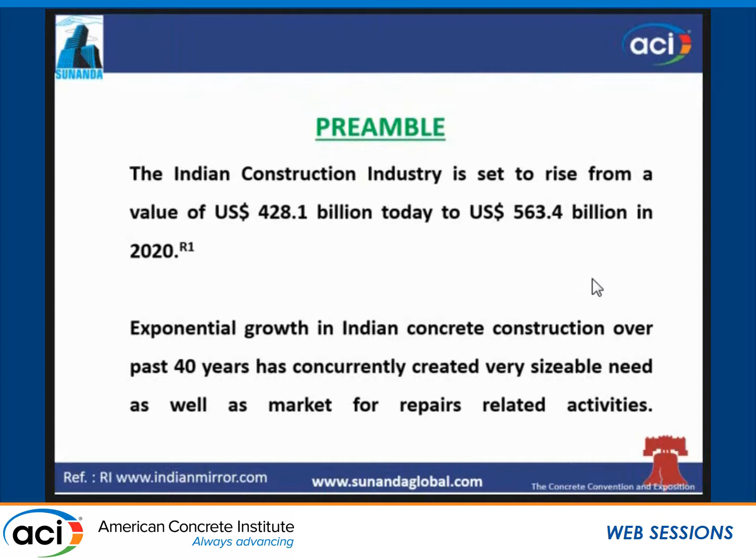India, just to give a number, is a 428 billion dollar construction industry today, slated to be 563 billion by 2020, and this exponential growth has happened in the last 4 to 5 decades. When this has happened in the last 4 to 5 decades, that means we have so many old structures in the last 3 decades which need our attention.

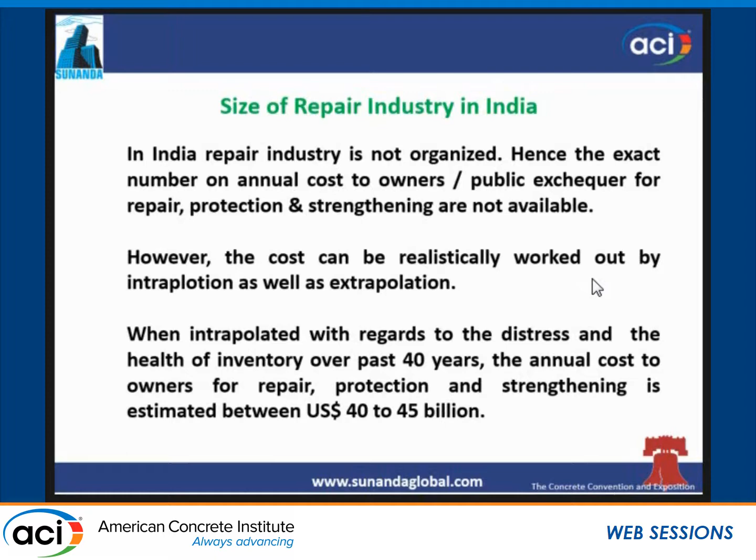If you just look at the number and cost of the repair industry, this is an unorganized industry, and that's why I had to knowledgeably interpolate and extrapolate the numbers. These are more or less real numbers, and it comes to something like 40 to 45 billion US dollars per annum.

If this is the size of this unorganized industry, then we need to look at why this deterioration has happened and what the Indian repair industry is seeing.

India is the second largest manufacturer of cement in the world, to the tune of something like 375 million tons per annum. India has transitioned from 15 MPa to 60 MPa concrete in the last 40 years. That means the stock that was probably of lesser grade concrete from years ago has come as a legacy which needs to be repaired and corrected.

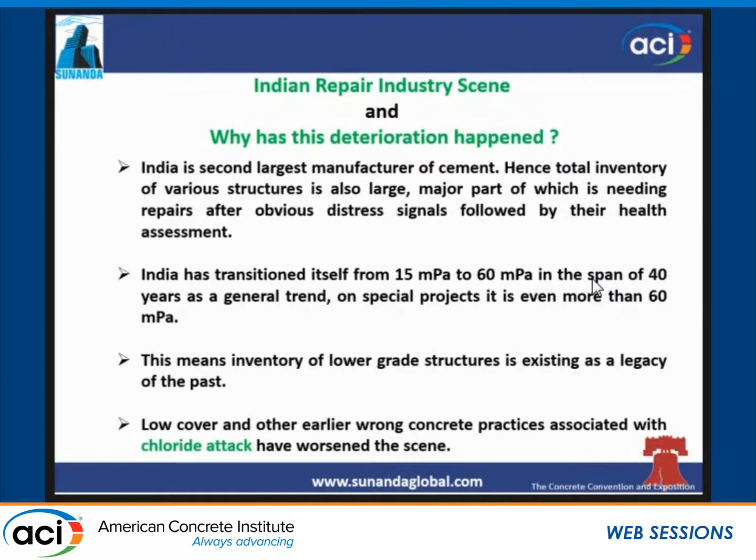In addition to that, low cover and other earlier wrong concrete practices, chloride attack, etc. have worsened the scene. India is a hot weather country with a long coastline of 7,000 kilometers with tropical rains. High temperature, humidity, high chloride attack, and high pollution are all game players here.

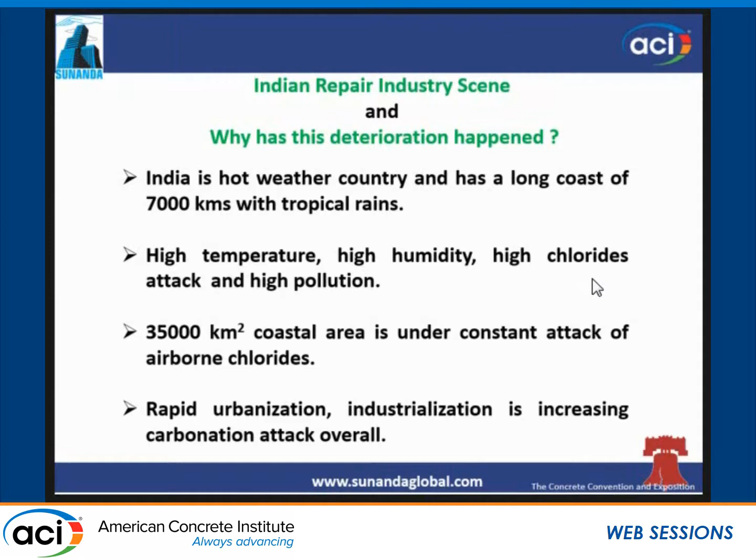35,000 kilometers square of coastal area is under constant attack of airborne chlorides. In addition to that, rapid urbanization and industrialization is increasing carbonation attack overall.

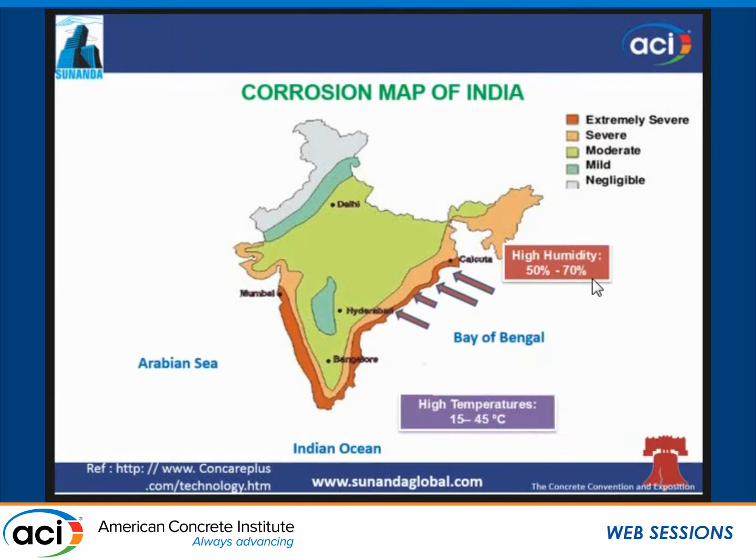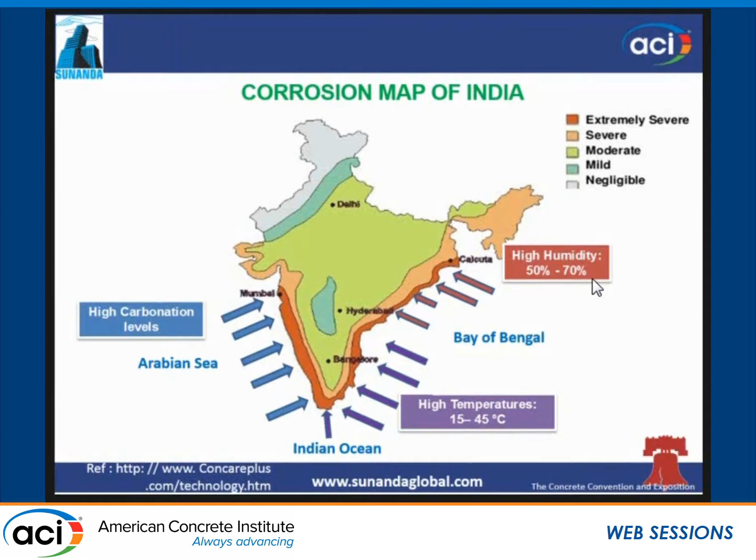This is the corrosion map of India. You can see various zones ranging from extremely severe to severe to moderate. This is the coastline, with high humidity, oceans from all sides, high temperature, chlorides, high carbonation level, and this is also one of the reasons why the repair industry is so big.

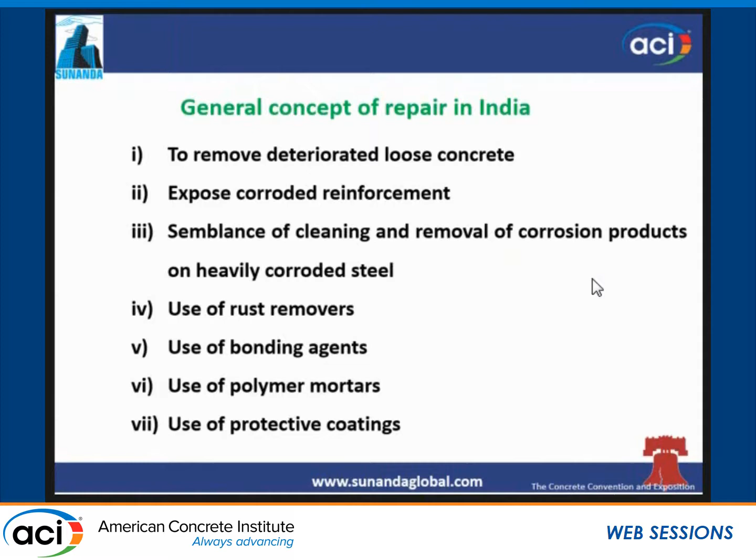What are the general concepts of repair in India today? They are no different from anywhere else, principally: removing deteriorated loose concrete, exposed corroded reinforcement, then some cleaning and removal of corrosion products from corroded steel, rust removers, bonding agents, polymer mortars, protective coatings, same thing.

However, with this exponential growth of the repair industry, unsatisfactory performances over the last 4 to 5 decades bring out what we need to look at: improvements in materials, design practices, installation procedures, contracting processes, QA/QC procedures, and most of all, education and allied aspects.

The common man is often getting alarmed by distress signals. Signals can be cracking, delamination, failure, or collapse. And when this happens in the whole neighborhood, state, or district, a chain reaction starts and the repair industry again starts booming.

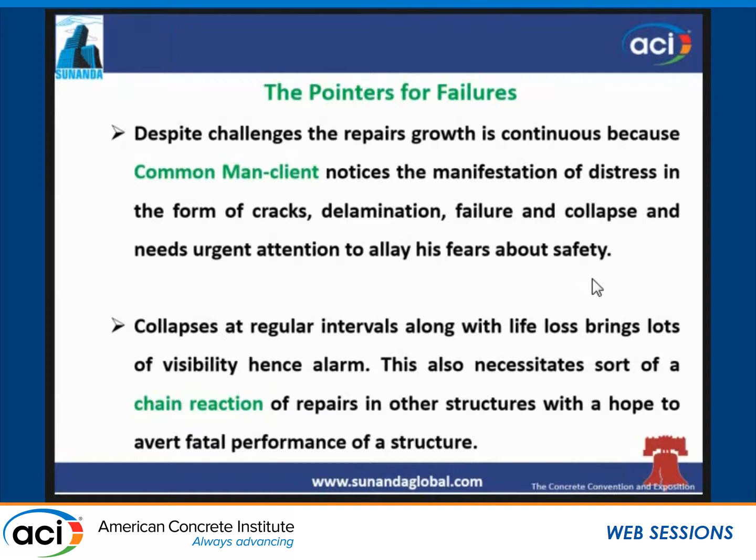This is one of the cases, in a downtown area. This can happen in a downtown area, and all the structures nearby or in the nearby districts also awaken all of a sudden, and whether they needed the repairs or not, the whole process began.

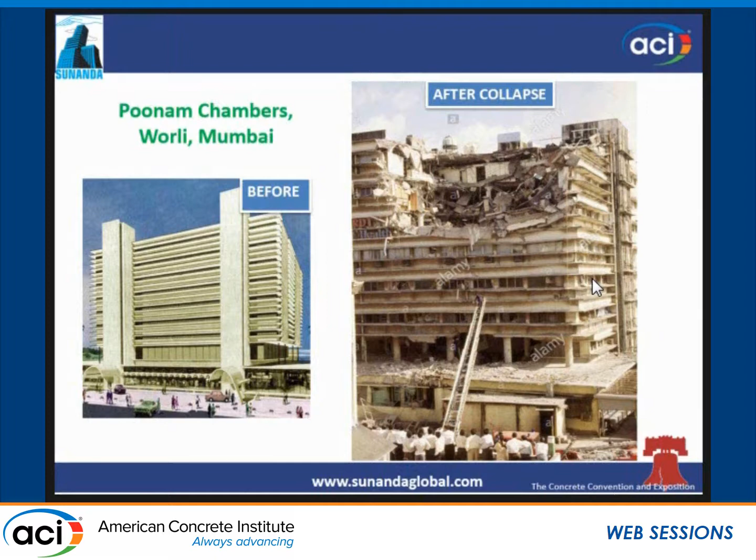I told you that most of the concrete inventory is more than 10 years old, and the concrete was site-mixed in those days without much control. Obviously they become more vulnerable to carbonation, chloride, and loss of alkalinity attack.

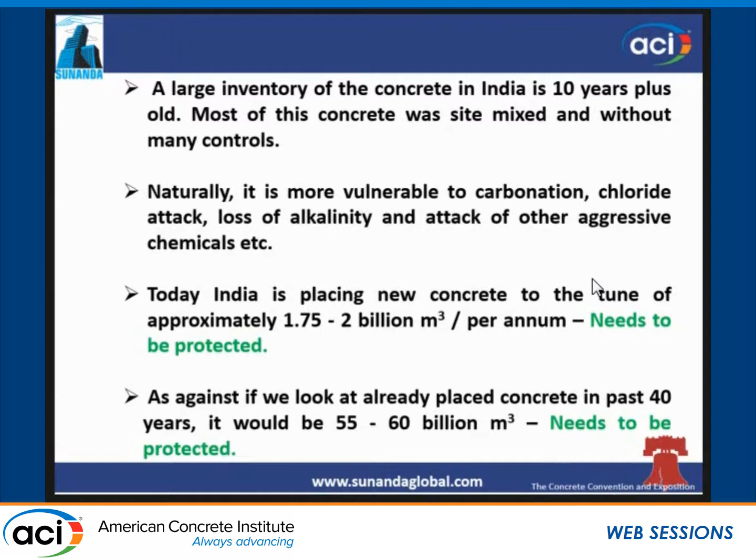New concrete today we are doing something like 2 billion cubic meters per annum. Of course this needs to be protected, and this will be protected. However, whatever has been placed in the past is something to the tune of 55 to 60 billion cubic meters, and that needs to be protected more, and that's where this thriving repair industry is coming from.

The short life cycle of repairs raises questions on the knowledge and awareness of the technical competencies of related personnel and agencies. Personnel can be consultants, engineers, contractors, or clients. Rebuilding the older structure is not the general norm, and that's why structures are to be majorly repaired, and as you will see ahead, unfortunately re-repaired.

In colleges, in schools, engineers or students are not taught concrete as a science and steel corrosion, and that's why that also needs looking into.

As a result, many areas remain grey areas, and hands-on training as well as learning state-of-the-art procedures is important. More sadly, material science, which is really an inseparable part of new age civil engineering, is not taught or learned anywhere, and that's why materials like polymers, epoxies, protective coatings, nanomaterials need more information for everybody.

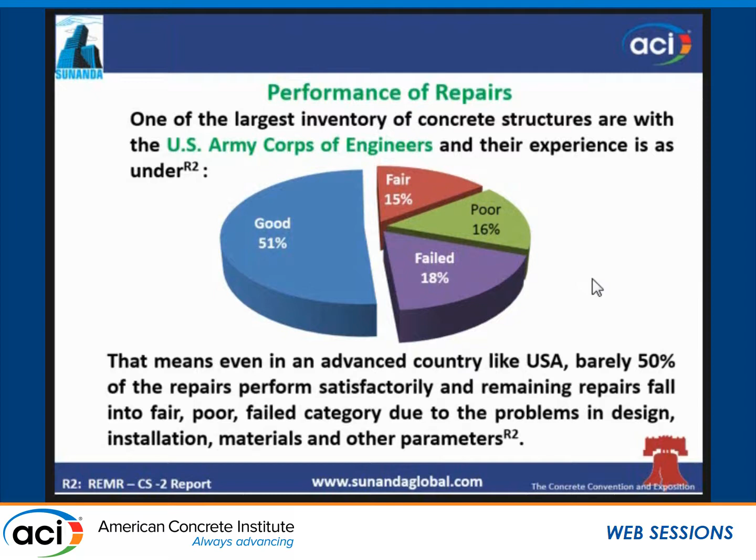What is the performance of repairs in India? For that I have taken some reference. US Army Corps of Engineers have just published data on their repairs, and this is the situation of repair performance in an advanced country. If you extrapolate, then that 50% would probably go to 20% or thereabout in India, and the rest will be as this is.

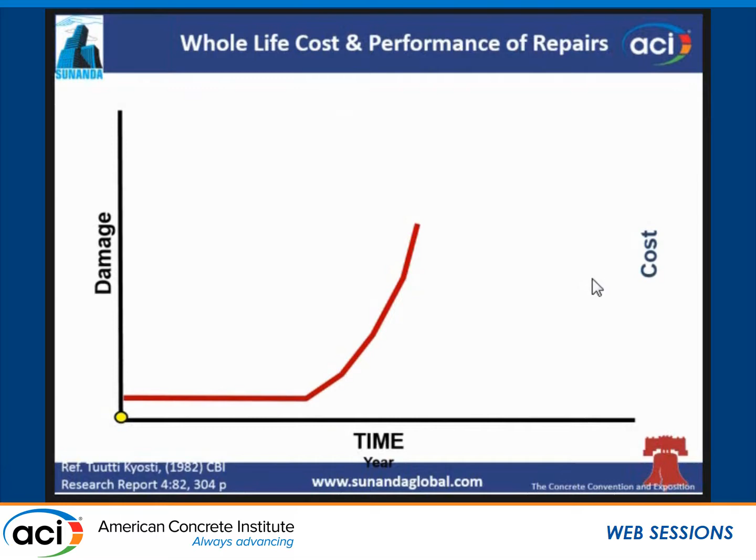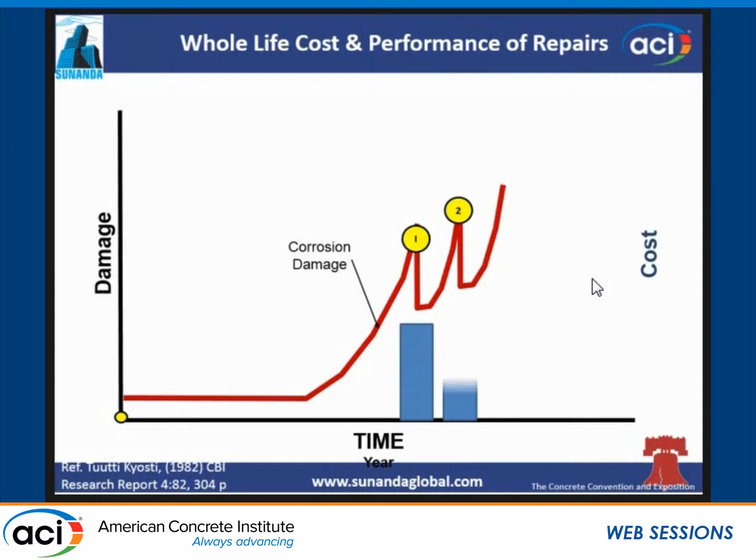What is happening? Damage versus time versus cost. The structure, when it gets corroded and damaged, loses its capacity, and then at first time intervention is required, the first repair happens. Damage comes a little down on the y-axis, then another repair happens because of lack of understanding while doing repairs, and then the cost mounts - second, then third, then fourth.

Like that, the cost goes on increasing, and that is exactly why we need to look into the concepts of responsibility as well as awareness concurrently together - cost 1, cost 2, cost 3, cost 4, and like that.

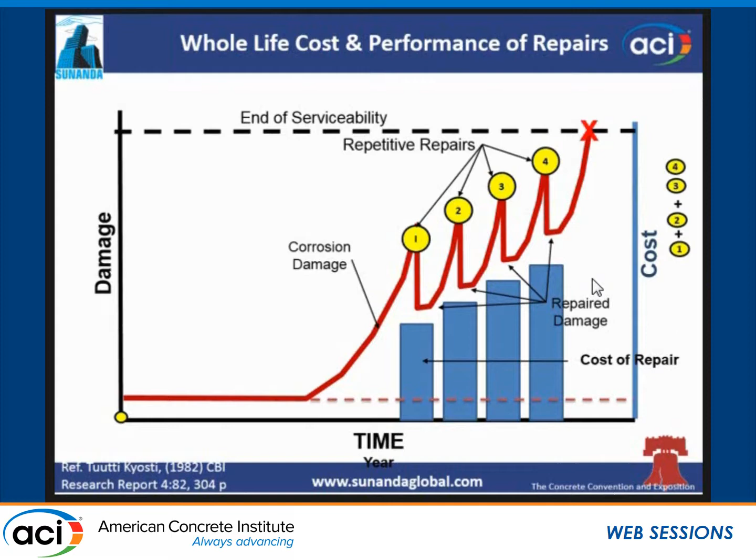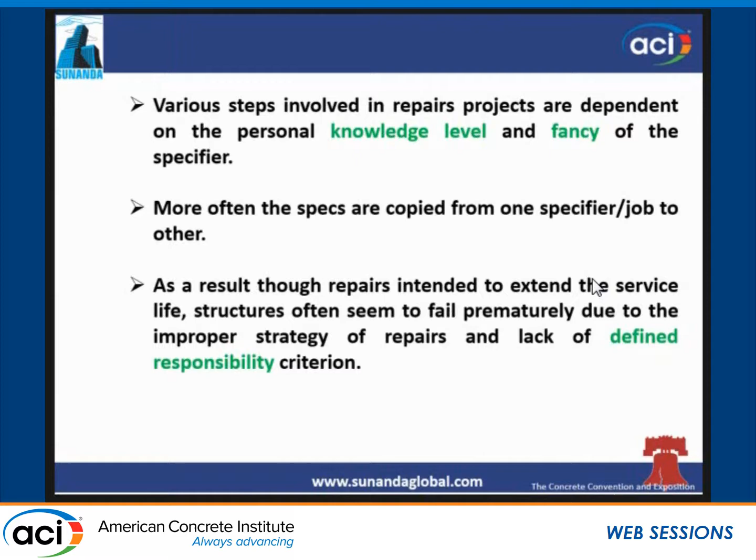As a result, the repairs intended to extend the service life cause the structures after repair to fail prematurely, and that's where defining responsibility criterion comes into the picture.

All this is realized, but it is realized too late when the failure and the loss is irreversible. Just to inform you, there are some quacks also practicing who will say that we will not charge you anything, or we will take nominal fees. How do they sustain and run their offices and homes, I don't know.

But then why does this happen? This happens because the industry and the country and the requirement is so big that somebody or the other, one victim or one gullible person, is always there to fall prey to this type of practices. Hence, strategy - I'm trying to present a strategy to increase the accountability of stakeholders and also make them collectively responsible.

Before that, there are several operations needed in repair jobs. All of us know: membranes, surface preparation, grouting, crack injection, foundation underpinning, vertical repairs, gunniting, shotcrete, underwater repairs, waterproofing, general concrete repairs, concrete placement, formwork, steel placement, post tensioning, cathodic protection, industrial floor repair. All these are specialized jobs, and when they are all specialized jobs, responsibilities come into picture.

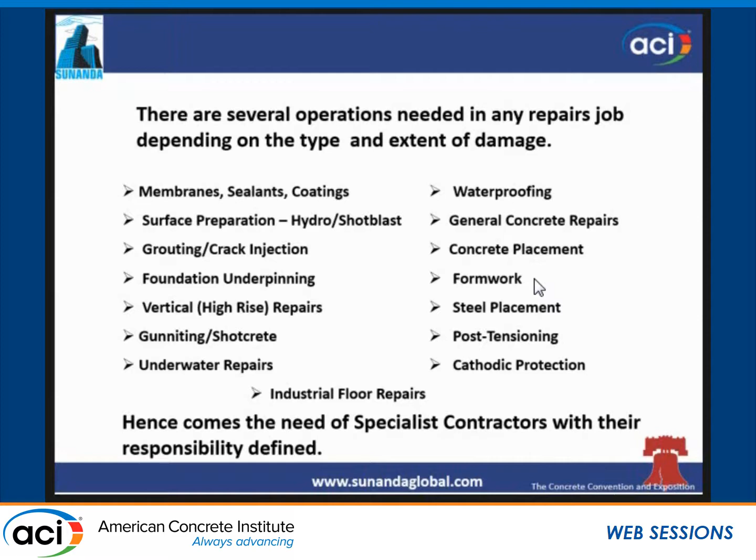Another thing is, individual repair jobs are smaller in value as compared to new construction, as was mentioned earlier. It becomes difficult for government authorities to just give completion certificate and inspect every small thing that is happening throughout the country.

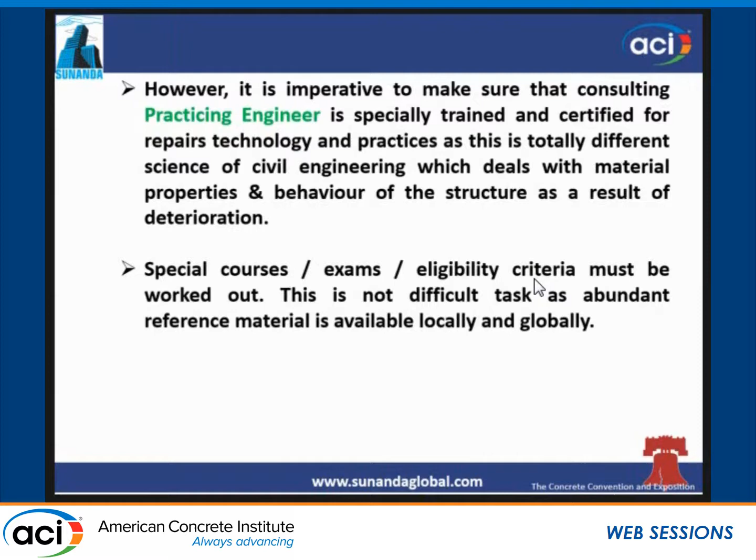And hence, the responsibility comes on the consulting practicing engineers, and they have to be specially trained and certified for repair technology and practices, and whatever I just talked about earlier about awareness becomes underlined. So if this unified procedure of qualified civil engineers is not there, then the consulting engineer has to wear several caps.

He has to wear the cap of an NDT expert, he has to wear the cap of material specialist, he has to wear the cap of corrosion expert, but he is only trained for civil engineering.

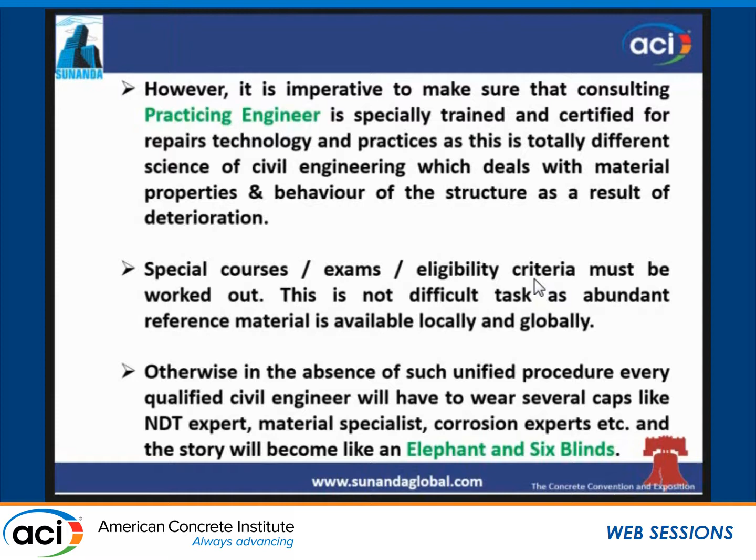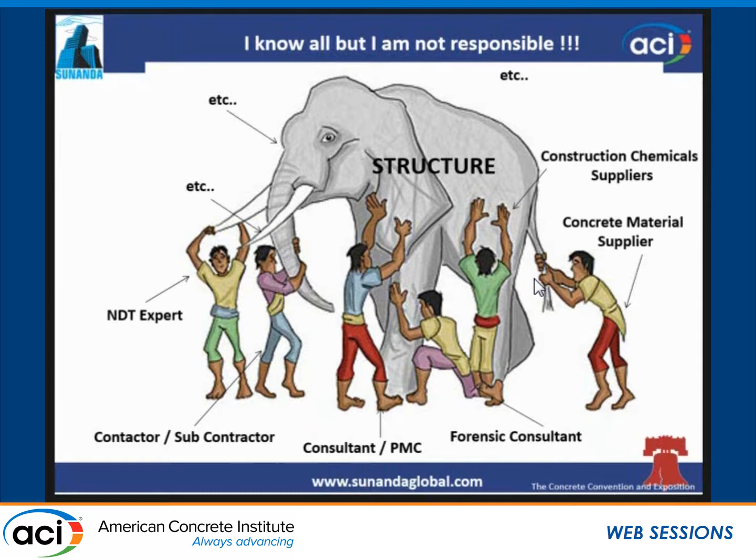And then the story becomes like the elephant and the six blind men. One person doing all these roles, and whichever part of the elephant or the repair comes in his hands, the repair will be treated in that direction. And hence the performance is as shown earlier.

Being smaller in value, we cannot have multi-level supervision. That is difficult and uneconomical, and that's why the consulting engineer and the contractor have to be more trained, more aware, more knowledgeable. But oftentimes the entire 360 degree idea about analytical, diagnostic and QC parameters for the contract, both on prescriptive as well as performance format, is not known to any one of them or most of them. And this is more so because it's not new construction - it has a multifaceted complexity along with ignorance.

So remediation can be, in my opinion, done only by two ways: increasing awareness and defining responsibilities.

Stakeholders - these are the stakeholders: engineers, architects, contractors, equipment suppliers, material manufacturers, testing companies, educators, researchers, lawyers, and they are benefited. But when they are benefited, it is always associated with the responsibility.

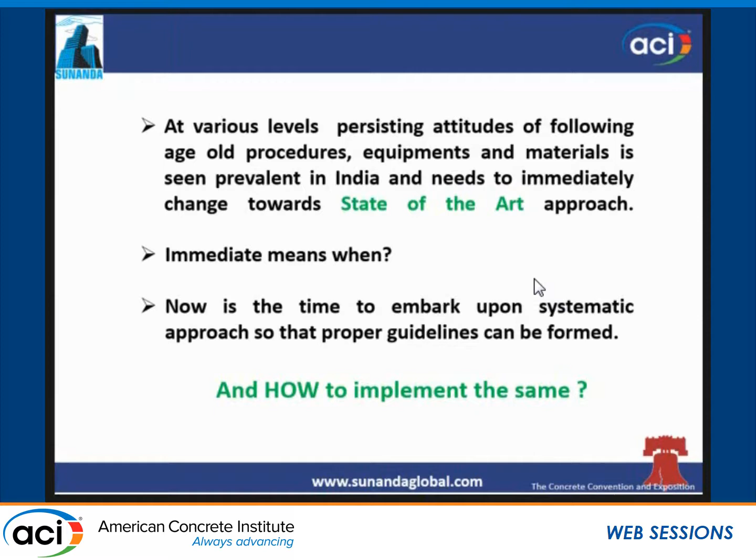The methodology, equipment, and procedures are old and not updated, and that also has to be brought to the state-of-the-art approach, and that has to be done immediately. Immediately means when? Immediately means yesterday, now. This is the requirement of the industry back in India. So now is the time to embark upon a systematic approach so that proper guidelines can be formed and implemented.

Then we come to the action plan. The action plan is to form a devoted group having representatives of contractors, engineers, material manufacturers, researchers, educators, owners, material scientists, and industry associations. Along with this group, if a nodal federal agency is also present in the system, then it gets some sort of credibility, authority, and compulsion to the recommendations of this group.

This should be a faster and far-reaching approach than leaving it to the industry alone. It must be made a time-bound initiative in the interest of the stakeholders, and the draft and the code will be peer-reviewed and then sent for wider circulation throughout the industry for suggestions.

This group will also give a vision. Why do we need a vision? Because repair is a dynamic industry. Every day a new facet of repair opens up to us, and we should be in a position to face that, to sort it out, and that's why we need to have a vision.

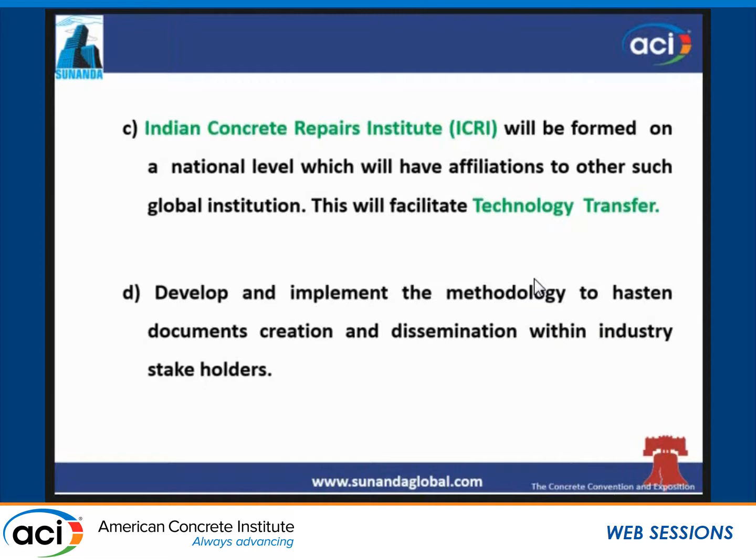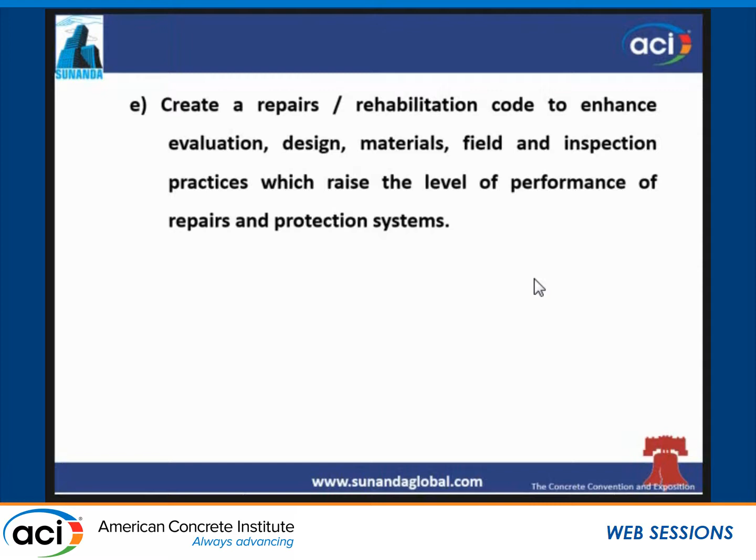Create a repair and rehabilitation code, which is not there yet, to enhance evaluation, design, materials, and field and inspection practices, establish clear responsibilities and authorities for all participants, and concurrently develop performance-based guide specifications for specific and generic repairs.

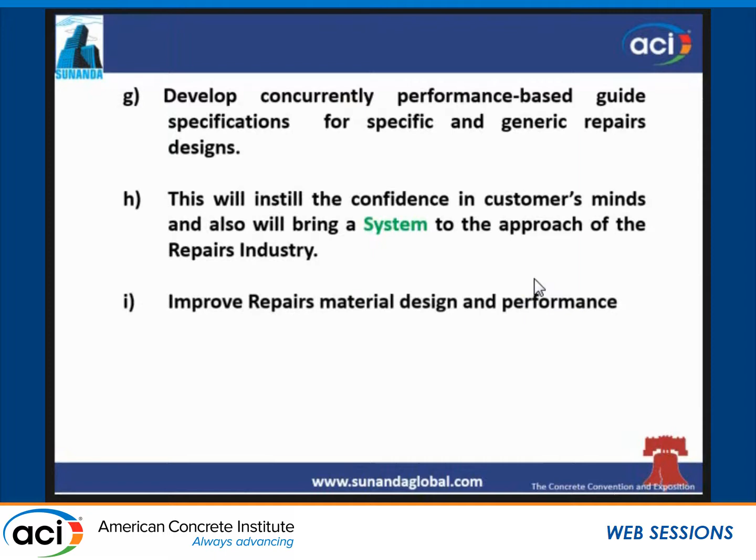This will instill confidence in clients, which is very important, and improve repair material design to eliminate cracking and carry structure loads. Define and develop, and most importantly, develop environmental and worker-friendly repair methods, equipment, and materials that will greatly reduce the adverse effect on workers, the public, and the Earth's ecosystem.

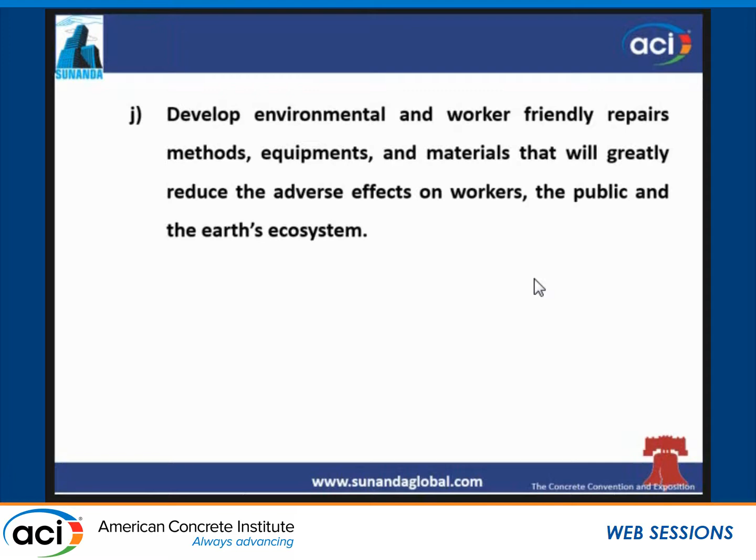Develop a means of predicting repair system performance, and develop and implement a strategic research plan for the repair industry with the help of universities, industry, and government as partners, along with upskilling.

Generally, what is happening is that trained workers are not available and semi-trained workers are doing the job. So upskilling of engineers is required, as well as the workforce. The Indian government has made a special effort in this - they have made a special ministry for upskilling, so that has to be taken into consideration.

Then develop selection processes, contractual agreements, procedural methods, and relationship agreements that will greatly reduce conflicts, rework claims, and lawsuits. We can take the support of these documents.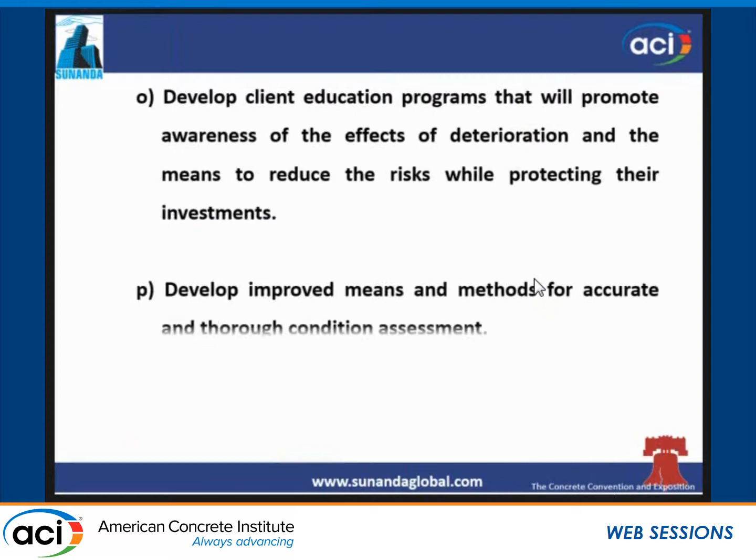I talked about this. The strategy will keep evolving.

As I said, it is a dynamic field, beginning to make this incredibly large, $45 billion business, more structured and responsible. And if this happens - this Vision 2025 which I am trying to give here for the Indian repair industry, starting today in 2016 - hopefully we will be able to get to this stage.

All the observations are based on my personal experience of the last 35 years, and my colleagues back in India or here can add to that, and I am very welcome to that. I am open for any suggestions. Anyways, thank you.